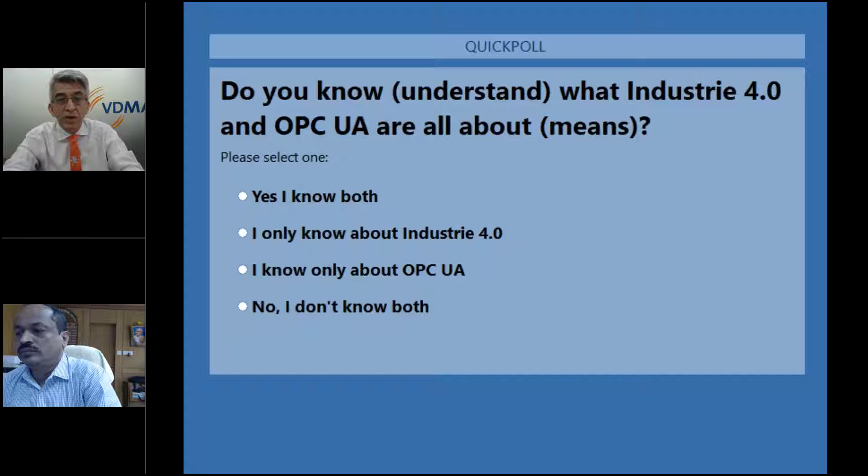Okay, Manoj, can we conclude the poll? It's quite encouraging. 35% of respondents know about both OPC UA and Industry 4.0, and 39% know about Industry 4.0. The awareness for OPC UA needs to be created, and that is the aim of this web seminar, to inform the Indian industry and the participants about OPC UA. We have 14% who don't know about OPC UA and Industry 4.0. For these participants, it will be a good learning as well as a good awareness on Industry 4.0 and OPC UA.

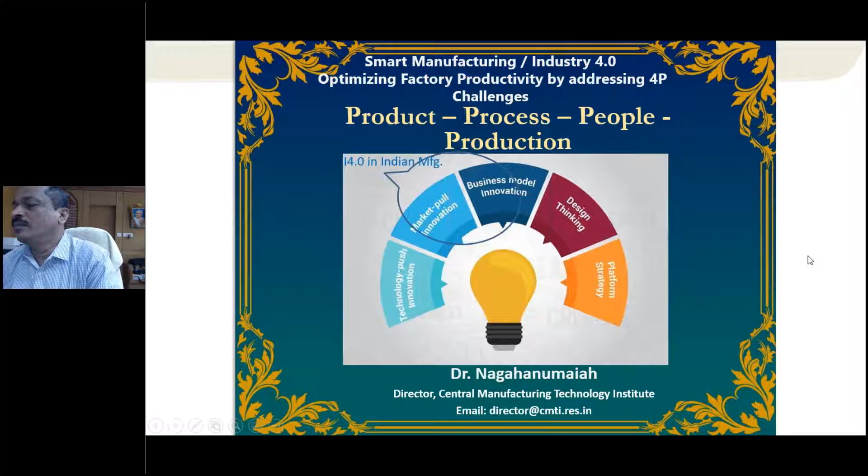My understanding is Industry 4.0, in the Indian manufacturing context, is more of a market pull innovation, partly a business model innovation. Next slide, please.

You are well aware of the vision of our Honorable Prime Minister, Atmanirbhar Bharat. Since there are many of our German friends here, I covered this slide for their sake. Atmanirbhar is not protectionism, it is not inward looking, it is not just import substitution, it is not even economic nationalism. It is the process of creating an ecosystem that will allow Indian companies to be globally competitive, thus making India self-reliant.

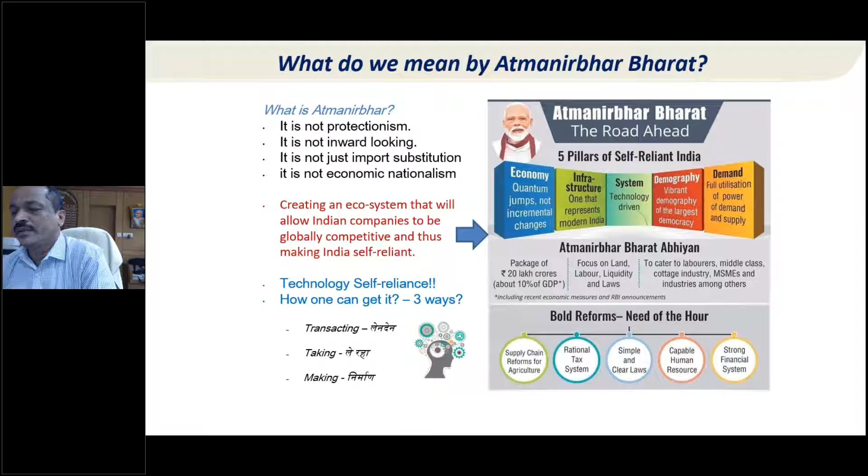So how is that possible? Technology self-reliance will not happen overnight. There are different ways, but three are the major ones: how we can get self-reliance by transacting, by taking, and by making. Next. Let us look at how this could be relevant, if we really wanted, one would catch up on this.

If I look at transacting, taking, and making are options available for the Indian company. So now, can I transact or do business? Here, the Indian manufacturing company has a strong pyramid. Basically the bottom of the pyramid is MSME. Each MSME has skill dependent and they are unique.

Unfortunately, many skill sets are even not traditionally developed, but not documented. And second, Jugaad innovation is still the USP of many MSME industries, barring the high-tech companies. Mostly MSMEs, even today, their survival is because of Jugaad innovations. But the disadvantage with this is the poor assurance, the poor repeatability.

So then can I purchase? Yes, again, it is difficult adopting the skills and capabilities developed elsewhere. Absorption is always a challenge in MSME because retaining intellectual manpower is really tough.

But yes, in the 90s, if you look at Maruti, it is one of the best known examples, because we acquired the technology, scientific manufacturing techniques from Suzuki. That made India a leader in automotive manufacturing.

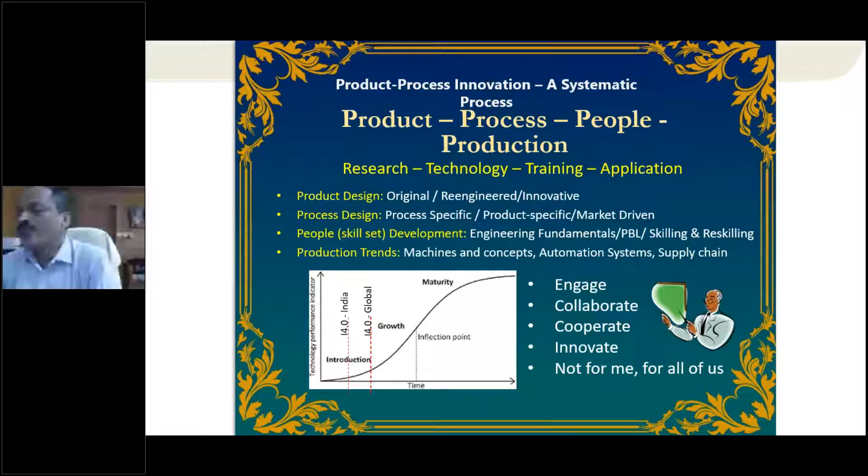This is always a systematic process. One has to depend on several other technologies. I think this is a very popular picture - it is there in Google if you search it.

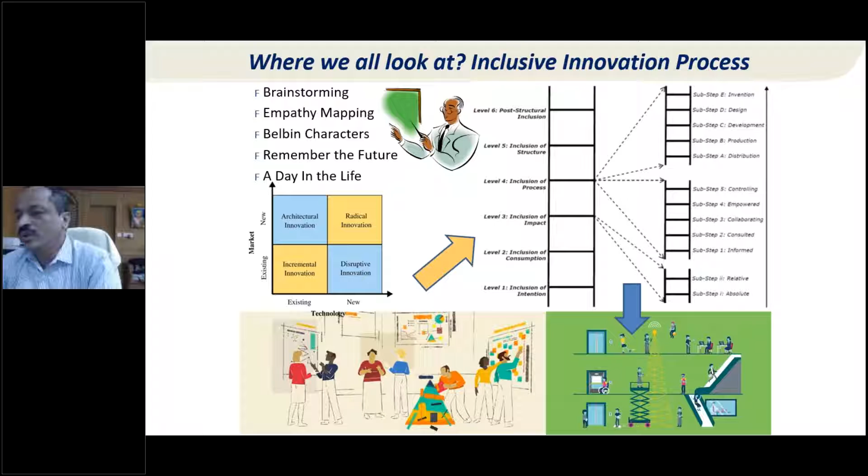Now at this stage, where we all look at, yes, this is a time to discuss and develop this technology in an inclusive way. Of course, there are several tools, this is just to emphasize what it means - inclusive innovation process. There are different tools available, so we need to follow this. I think this is where we now stand globally. Definitely there is a requirement of several technologies, including a common language.

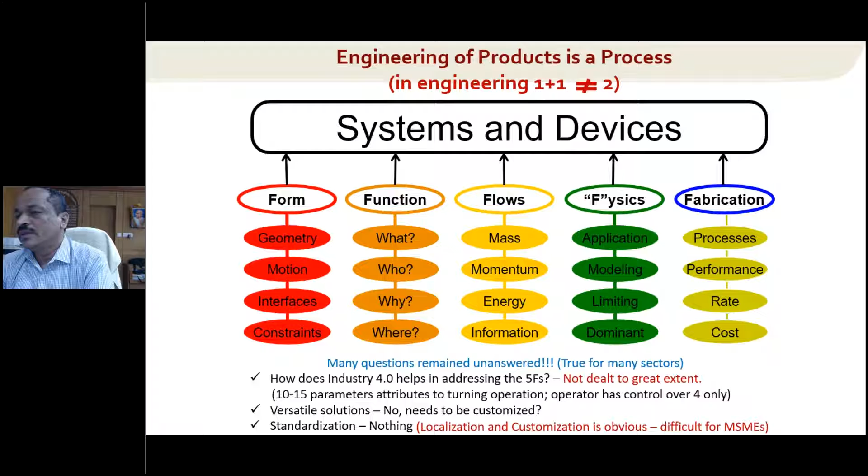Second, when we look at Industry 4.0, you cannot look at this in isolation, because manufacturing involves three essential components: the manufacturing process, which means the process has to be intelligent enough; the manufacturing equipment, which means your machine should be smart enough; and you should also address the other aspect, you should have smart operation systems. So Industry 4.0 being implemented covers all this, and only then can you realize the smart factory. With this background, CMTI has our Smart Manufacturing Center.

We are trying to develop some of these solutions, both following cooperation and collaboration. We collaborated with about 6 industries, and we have also created test beds that would facilitate cooperation with other co-developers for technology acquisition and implementation.

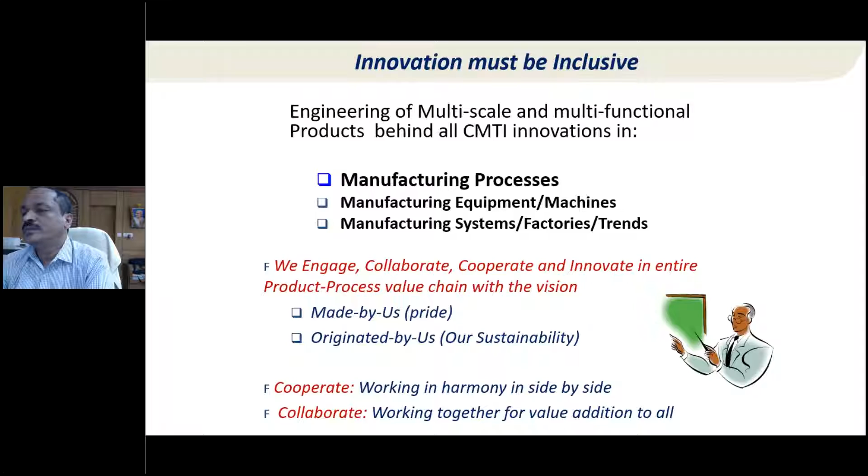We have conducted several awareness programs, and there were a lot of queries, some of which I mentioned in the previous slide. At this moment, our advocacy to small scale industry is: there is no universal technology, you need to customize. Also, several attempts are in process to develop standardized practices, so one has to look at engineered as well as indigenous technologies.

Indian industry being an MSME-focused manufacturing sector, no one will accept if I go and say that you should change your capital and buy a completely integrated smart machine. It is not going to happen. So our center particularly focuses on helping MSMEs convert their individual legacy machines into smart machines. That is one approach.

Second, once you can do that, you try to work on connectivity of the machines. Once machine-to-machine connectivity or interfaces are established, then you look at the shop floor, connecting the shop floor to the public network. Big data, analytics, and enterprise management may be a little difficult for MSMEs to have.

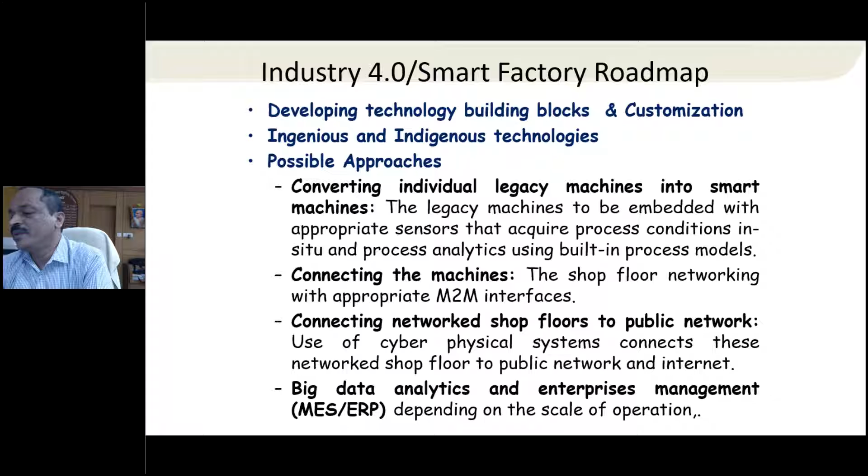The reason is HR is the major constraint. But fortunately, many startups have started focusing particularly on big data analytics, data sciences, and manufacturing data science management. I think these services could be made available to MSMEs in the near future.

With this background, yes, there has been a lot of emphasis from the government side in India. One major initiative from the Ministry of Heavy Industry, our parent ministry, has come up with programs like Samarth Udyog Bharat, wherein 4 such centers have been established: one at CMTI, another at IISc Bangalore, a third at IIT Delhi, and one more at the private Kirloskar Center of Learning in Pune.

These Samarth centers are similar, and at the same time focusing on different aspects of Industry 4.0 technology pillars.

For example, the Pune Center conducted a survey. I'm just showing 2-3 slides of what they found in that survey. They assessed 3 parameters: limited awareness, underdeveloped system ecosystem, and implementation support. Their survey indicates that there is a varying definition of Industry 4.0, so it is not very well understood by many companies.

Appreciation of relevance to the business is something the industry is not yet able to reach, hence limited perceived value. My comment on this condition is, as I said, there is no universal technology. Today, if somebody asks can you implement a technology that gives well-evidenced ROI, the answer is no, because it should be implemented or customized to your local company, machine, and shop floor. That is how it happens, so I think this will take some more time.

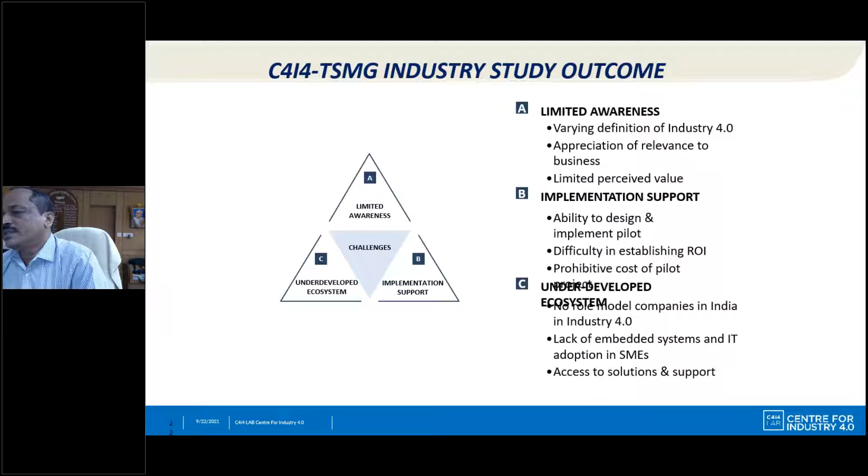This is another aspect, subject to the area, like advanced manufacturing technology, additive manufacturing technology, IIoT aspects, and with respect to CapEx spends. This study has done a detailed analysis. What it says is over 50% of organizations either have no investment plans or plan to spend less than 5% of CapEx on Industry 4.0 adoption. I think that is the kind of indication of where Indian companies stand today with respect to Industry 4.0.

Of course, this study is more MSME focused. Next.

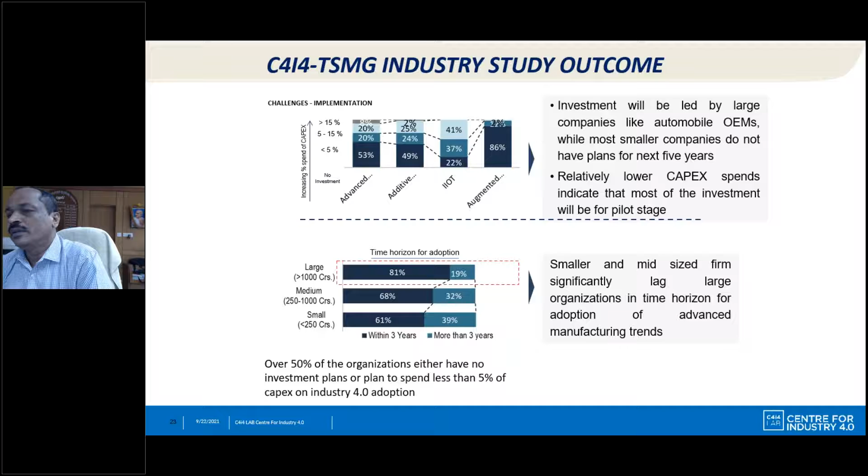Depending on this outcome, there are many activities. Basically we try to identify these in our Centers of Excellence, which are funded by our ministry - technical consulting, business consulting, pilot designing, adopting startups and startup mentors. That is where we also conduct several awareness programs. I think all our 4 centers are focusing on this.

In addition, our CMTI Center is establishing a smart factory, which is a production factory demonstration cell. Similarly, the IISc Center works on different technological aspects, more software-dependent solutions. And IIT Delhi works more focused on control aspects. Like that, we basically address different problems. All four centers collaborate with each other and work together. Next.

Next slide. I think the details here are not readable, but basically different parameters have been identified. We, the Centers of Excellence, conducted a survey among industries, both MSME and large scale industry. What I find is that the 50% figure we mentioned is more representative of small scale industry status. Next slide.

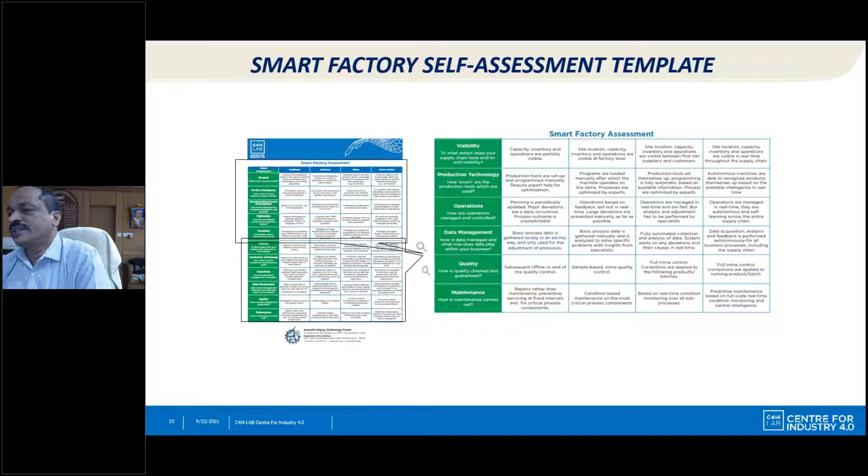Now we are working on different other aspects. The basic idea is that these challenges have to be addressed. One is where to start the Industry 4.0 journey - this is where industry is looking for an answer. How to prepare a systematic digital transformation roadmap in the company. Are my suppliers and customers ready for horizontal integration of Industry 4.0 solutions? I think these are the fundamental questions that have to be answered.

The solution would be understanding where they are in the journey towards digitization, identifying and setting priorities for immediate opportunity areas for digitization, and creating a successful digital roadmap for the company. This is where the Centers of Excellence come in, supporting MSMEs in different ways, starting from awareness programs to demonstration of a smart factory. Next.

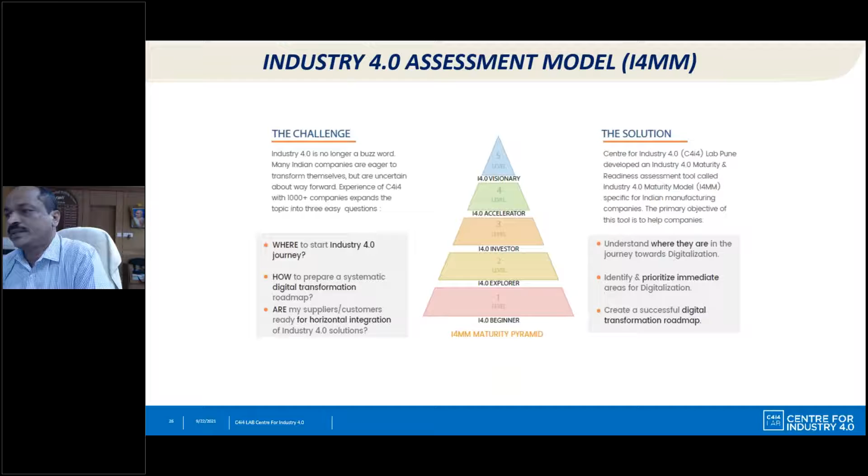This is another study conducted for specific applications. Several such studies were conducted. This one is for plastic component manufacturing, components produced by injection molding. Our centers try to help the MSME in identifying the complete value chain, the manufacturing value chain of their business profile. Next slide.

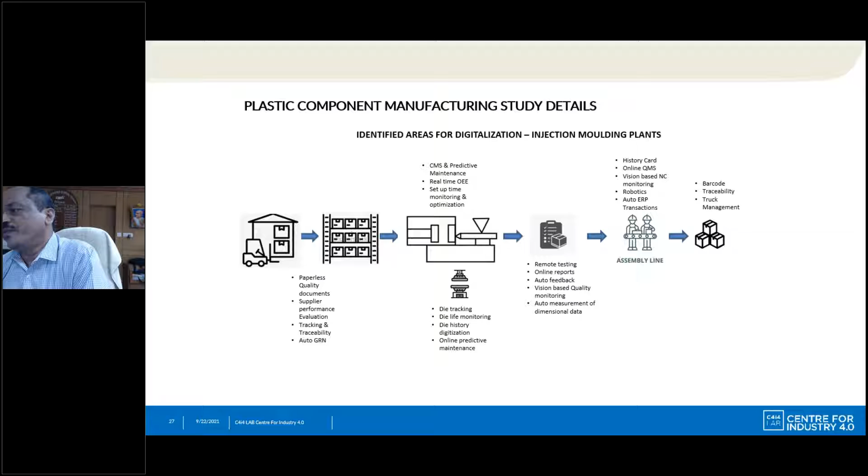What we do with our center, particularly CMTI center: we build machines. We are basically machine tool builders, so we are working on building smart machines and devices, making manufacturing process intelligence, and then training, technology transfer and incubation. Next slide will show the pictorial representation.

This is the smart factory being established at CMTI. We are trying to mimic a complete factory - it is like a smart production factory. As I said, there are two purposes: one is showcasing, and the second is providing services like a test bed.

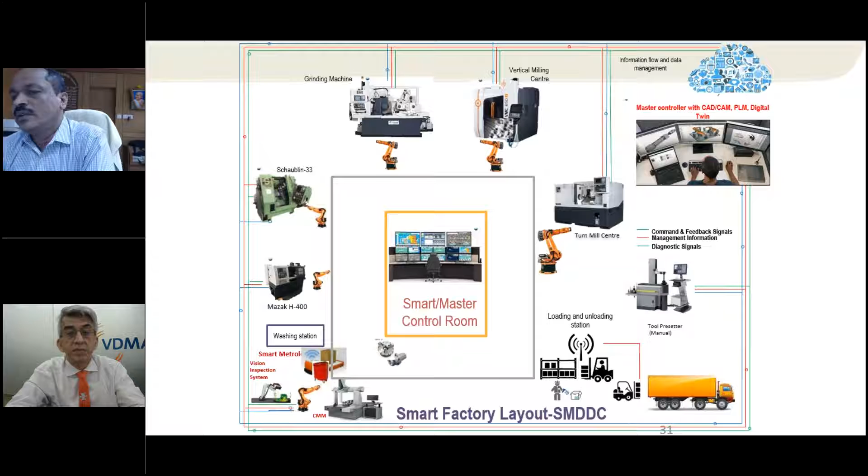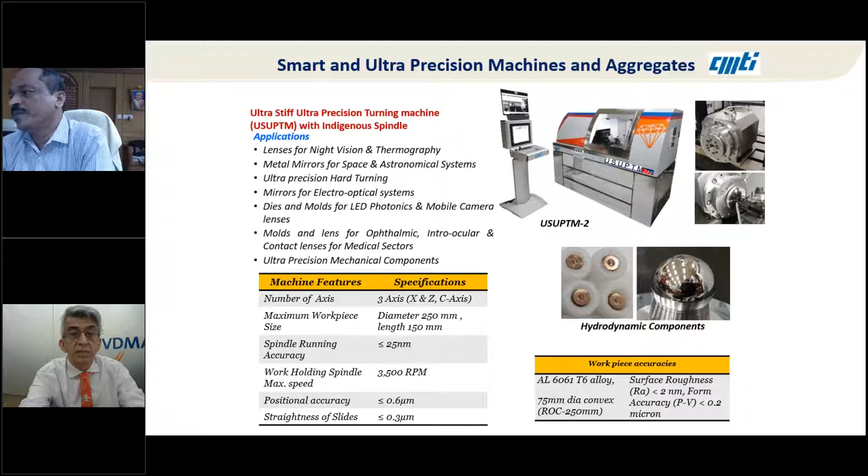Here I will give one more example. Recently we collaborated with 3 research establishments - NIST, CMERI, and CMTI - and with 7 academic institutes, to develop IIoT implementation on metal casting. I think this project is quite successful.

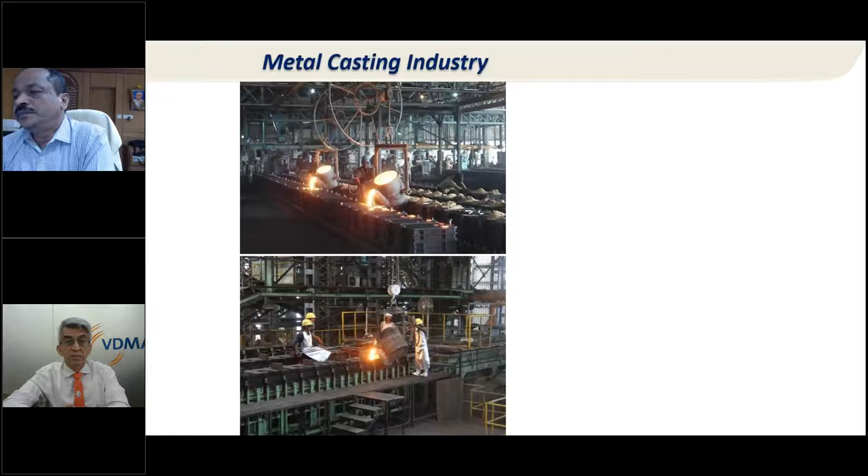What we are trying to do is convert automated metal casting, shown on the left side, into a smart foundry where all machines are connected, established within 25 square meters, within 25 lakhs, and completely smart. That is the concept we started with in early 2017. Now this has been developed.

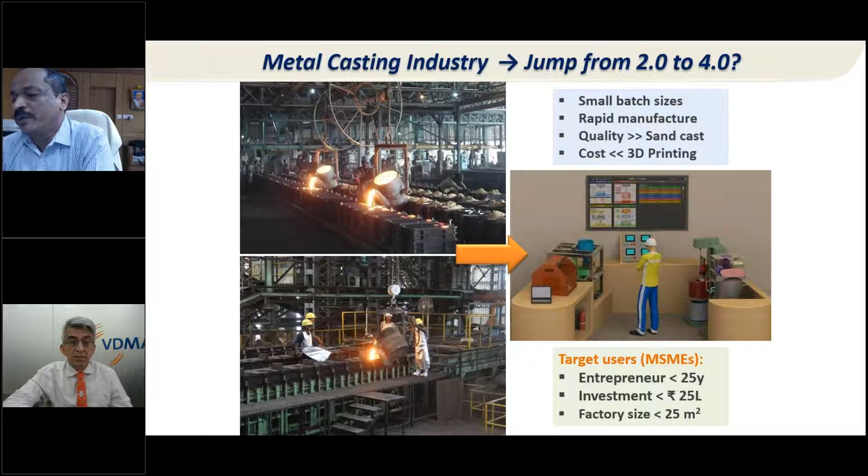I think this is a good, clear demonstration that a heterogeneous team can develop a complete solution, starting from part design to hardware, sensor integration, including IIoT platform for metal casting. Nothing like this exists globally, including data visualization and evaluation. The complete solution is developed by a group of 10 research groups.

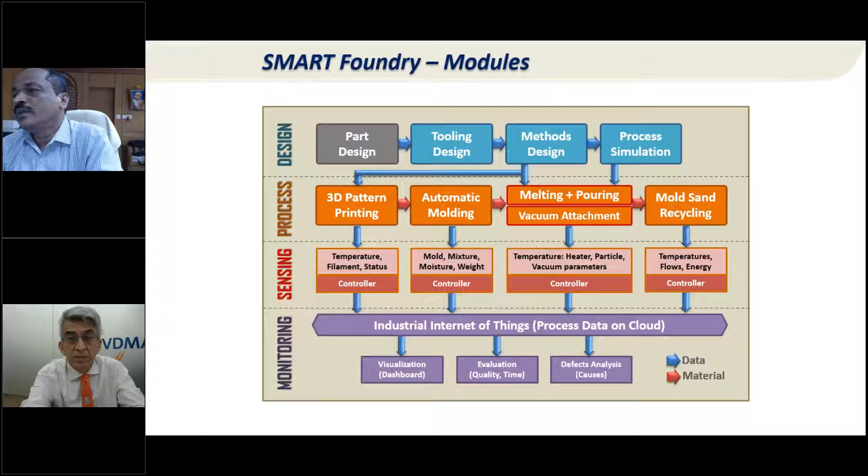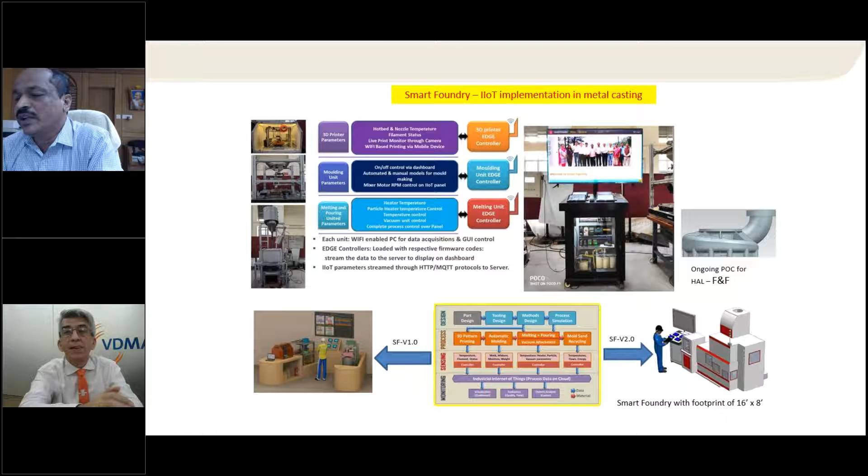We are running short of time, so let's move to the last slides. Basically, this is what we have developed: the factory, the foundry, within a footprint of 16 feet by 8 feet.

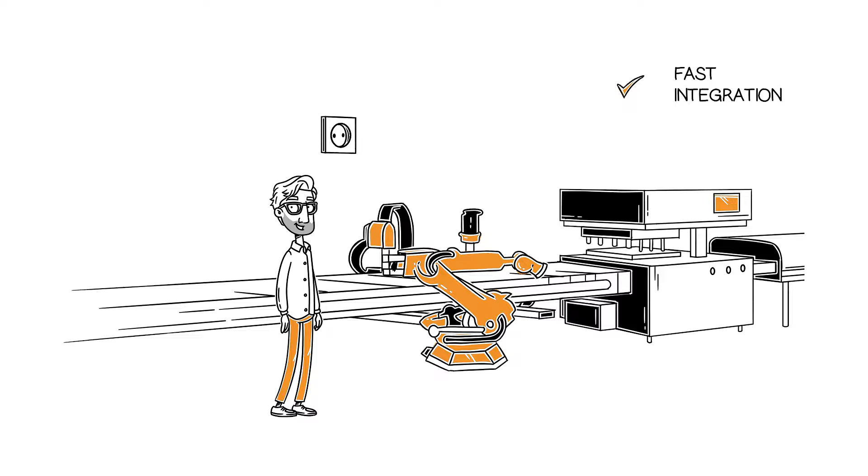Together with mechanical engineering companies, the VDMA is developing OPC UA companion specifications. Why? Open Platform Communication Unified Architecture, or OPC UA for short, allows engineers a platform-independent, interoperable, and vendor-independent integration of different machines in production. The VDMA represents more than 3,300 member companies and is the voice of the mechanical engineering industry in Germany and Europe. The VDMA supports manufacturers in developing OPC UA companion specifications. This ensures smooth Industry 4.0 communication, both between machines and from machines to other systems, leading to more efficient production. For engineers, this results in the Industry 4.0 application fields of plug and work, condition monitoring, predictive maintenance, and OEE improvement. OPC UA companion specifications define the form in which machines provide certain information, making integration into an existing production environment and configuring machines much easier and the engineer's work much more efficient. That's how Industry 4.0 works.

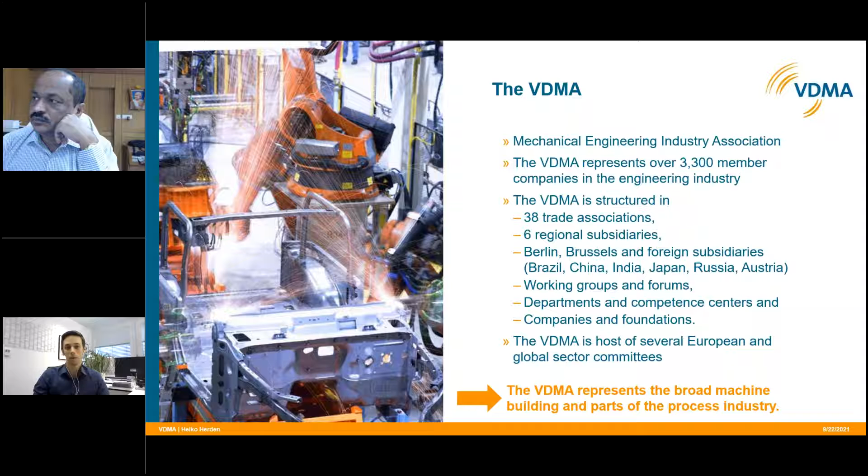Yes, thank you very much. I'm glad that I see so many participants here today. As we have seen in the poll, it seems like some information on OPC UA isn't wrong here, so let's directly start on the topic of the global production language. First of all, I'm from the VDMA, and as Rajesh Nath already explained, we are the Mechanical Engineering Industry Association of Germany. What's important for the later slides is that the VDMA is structured into 38 different trade associations, and all of those work more or less on the companion specifications we saw in the video, but I'll get to this later. So let's get started on the topic.

We want to connect machines, and we want to connect them on different levels: horizontal networking and vertical networking. Horizontal networking means the machine is on the same level with, for example, another machine, so machine-to-machine communication on the field level. Vertical networking means the machine is communicating with something on another level, maybe a lower level to a component, or a higher level to an MES system, an ERP system, or a cloud system. These are the two kinds of networking.

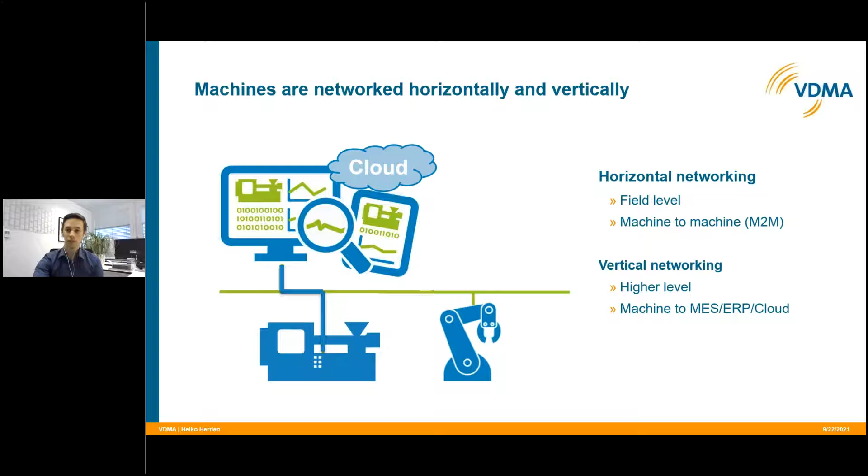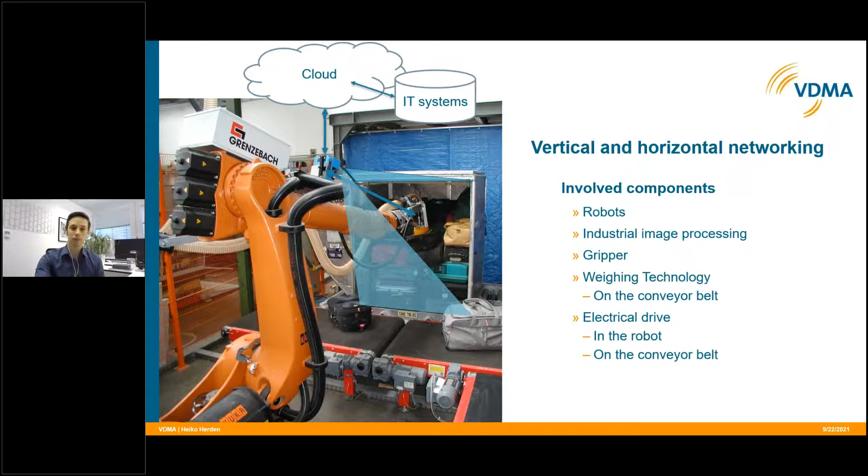And in the end, they also need to communicate with some sort of system. It might be in the cloud, but it might be some IT system within an airport, for example. And what we want to have is manufacturer neutral interoperability in the industrial environment. This is what is desired.

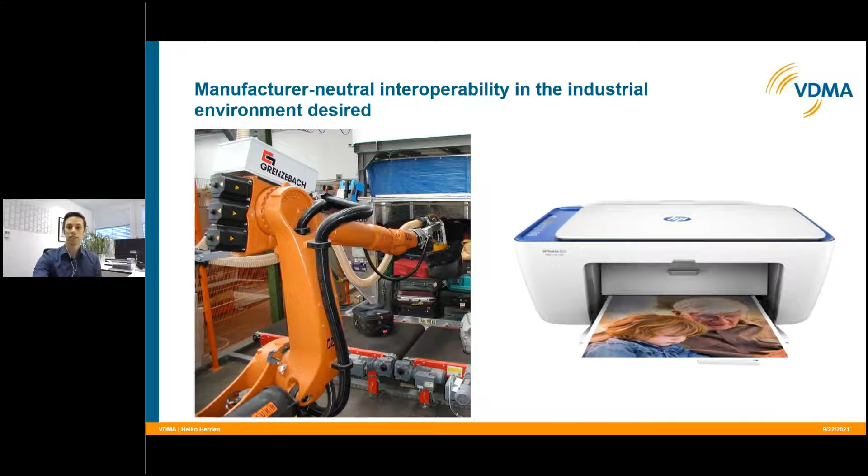What does this mean? It means the components we have seen should easily work together, as easy as if you go into the market, you buy a new printer, you connect it to your home computer, plug in the USB plug, and it will work, or maybe it will install some driver, but it will work afterwards, and you don't need an expert to come to your home and adjust it for several hours. It will work. This is what's called plug and work, and this is what we are aiming for in the factories as well. And to achieve this goal, we figured that OPC-UA is a solution.

OPC-UA, as you have seen in the video, stands for Open Platform Communication Unified Architecture. It's also an IEC standard, and it meets all the different requirements for mechanical engineering. For example, OPC-UA is open source. It has security built in by design, which is very important these days, so you have secure transmission of your data, plus profile management, user management, certificate handling and stuff like this.

There are various protocols that are part of OPC-UA. I will tell you a little bit more about this later. And this is a very important point: OPC-UA has the possibility to have semantic machine descriptions in those companion specifications.

Also quite a good point about OPC-UA is that it is scalable. So you can have it in very small embedded devices in the field, as well as on a very strong computer running Windows or Mac software. And all those OPC-UA clients or servers work together in the end.

So what is OPC-UA, the technology? It consists mainly of two parts: the part of transportation and the part of information. I want to go through those two parts and tell you a little bit more about it.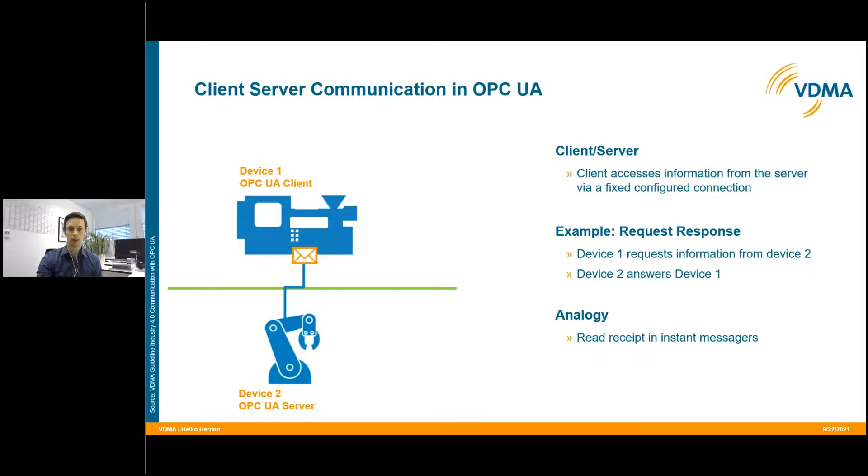Then the third mechanism is PubSub, or publisher-subscriber communication in OPC-UA. This means that the publisher sends the information out to unknown subscribers without a fixed connection.

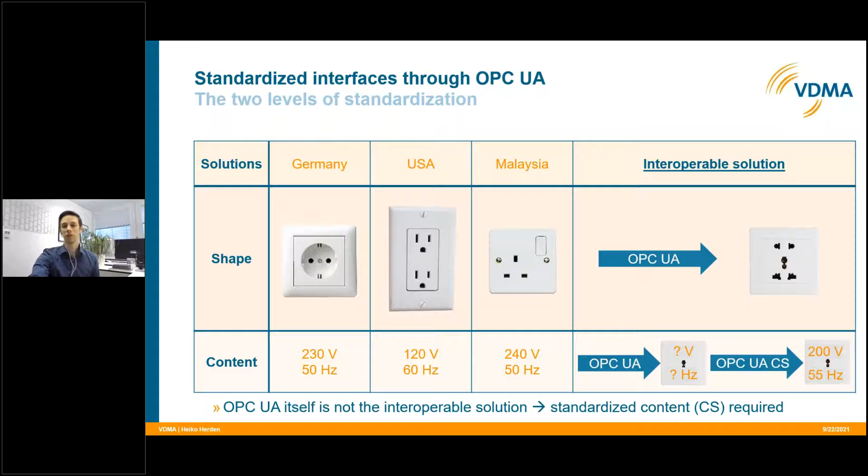And this is how I get back to this slide here. So we have the transport on the bottom, which is very important to have our solution in the end, but we also need the information part, and this consists of different levels.

On the first level, we have the OPC-UA meta model, where we have the description of things like what is a string, an integer, so very generic information. Then we have built-in information models which describe, for example, some basic things about what is a device, and those things are handled by the OPC Foundation.

On top of that, we have OPC-UA companion specifications. So every domain, for example robotics, describes the information which an interface of a robot should have. And for the field of mechanical engineering, the VDMA is leading all those companion specification groups.

On top of that, you can still have vendor-specific extensions, which means that if you have something that is quite special and is maybe even a reason why you sell your machine and not your competitor's machine, then you don't put it in the standard, you have it on top.

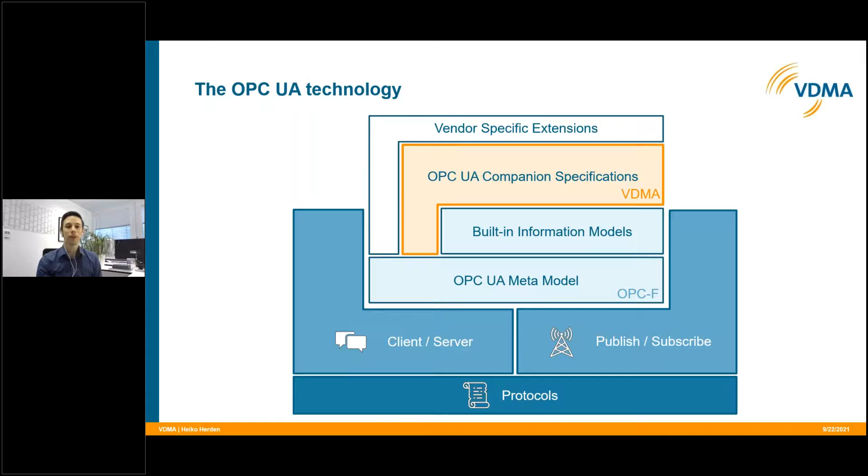Now let's take a look at VDMA organizations. I mentioned the 38 trade organizations. You can see them here.

Now let's see where we have OPC-UA companion specifications standardized already. I marked them in blue. When they have something out on the market already, it's either a release candidate, which means you can still comment on a draft, or it is a fully released companion specification, which means it has already been a release candidate for at least 90 days.

So we have compressors, compressed air and vacuum technology. We have food processing and packaging machinery. We have glass machinery, machine tools and manufacturing systems, machine vision. There are quite some companion specifications for the field of plastics and rubber machinery. We have the field of pumps and systems. We have the field of robotics, like I mentioned before. We have the field of weighing technology and woodworking machinery. So there are quite some companion specifications out already.

You can download them on our VDMA homepage, on the homepage from the OPC Foundation, or on GitHub. The companion specifications are free, so you can just use them. If you want to get involved in creating companion specifications, you have to be either a member of the OPC Foundation or the VDMA.

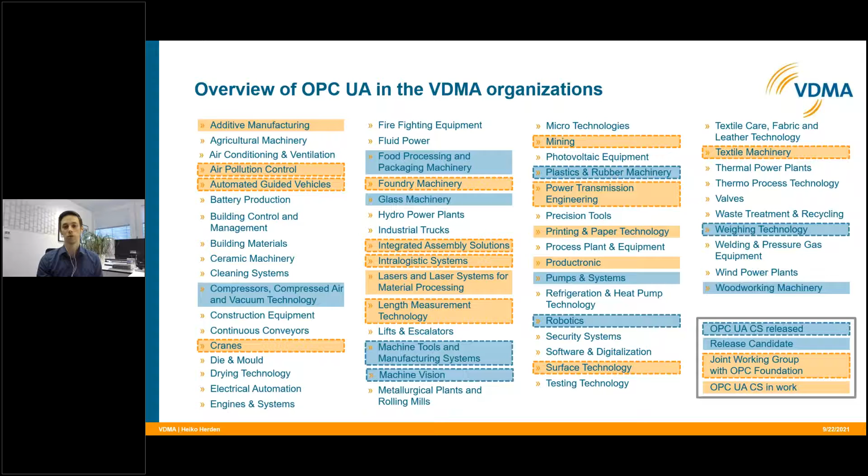So let's take a look at what groups are working on companion specifications at the moment. As you can see, it's even more. I marked them in orange here. We have additive manufacturing, air pollution control, automated guided vehicles, cranes, foundry machinery from metallurgy, integrated assembly solutions doing end-of-arm tools like the gripper we've seen before, intralogistic systems, laser, length measurement technology, mining, power transmission engineering working on electrical drives, printing and paper technology, productronic, surface technology handling material supply systems, and textile machinery also has a group working on a companion specification. So in general, you can see we put a tremendous effort on this. We have more than 25 sectors in active development, more than 35 active working groups, and this means more than 600 companies are involved in describing those companion specifications.

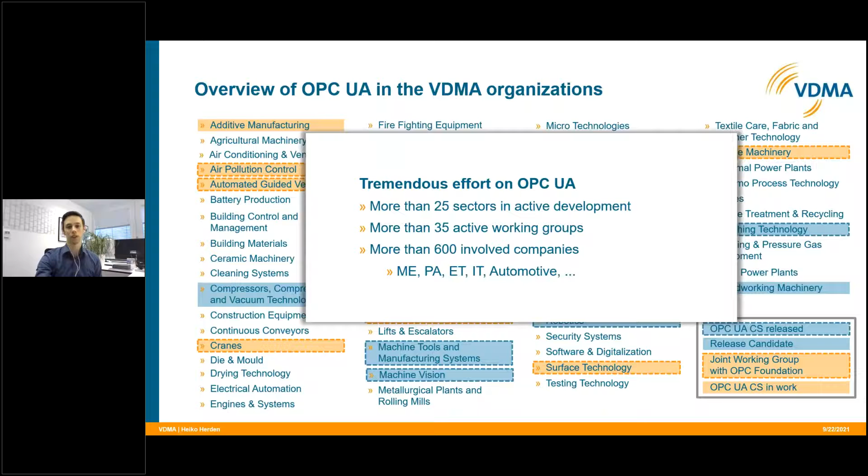So we want to achieve interoperability, that's what I said in the beginning. Now let's see where we are. We started with Industry 3.0, which was proprietary communication, and now we're going towards Industry 4.0. With OPC UA we have a meshed communication network, which is the basic foundation for everything. And with those groups I've just shown you working on companion specifications, we have domain-specific harmonized information models, which is the next step for Industry 4.0. But to really achieve the idea of plug and work, we need cross-domain harmonized information models.

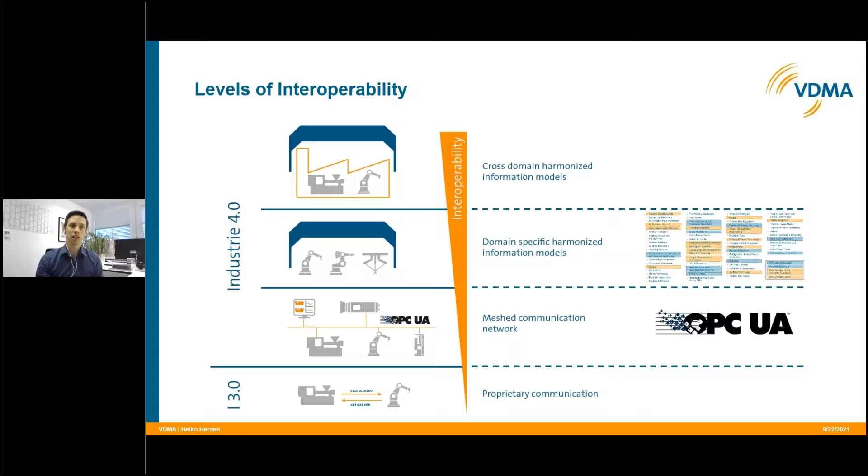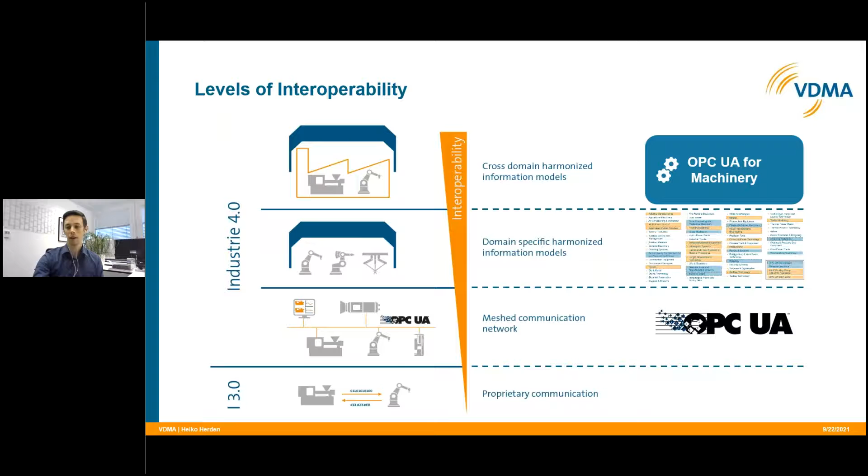And to get those cross-domain harmonized information models, we have a group, a companion specification called OPC UA for Machinery. I'll tell you a little bit more about it now. OPC UA for Machinery is a companion specification, but it's not just for one sector like robotics, drives, woodworking machines, or glass cutting machines. This one is really for the whole mechanical engineering industry. In machinery, we define harmonized basic building blocks for broad use, and each building block stands for a specific use case. This means those building blocks can be referenced from other companion specifications or implemented as a standalone model.

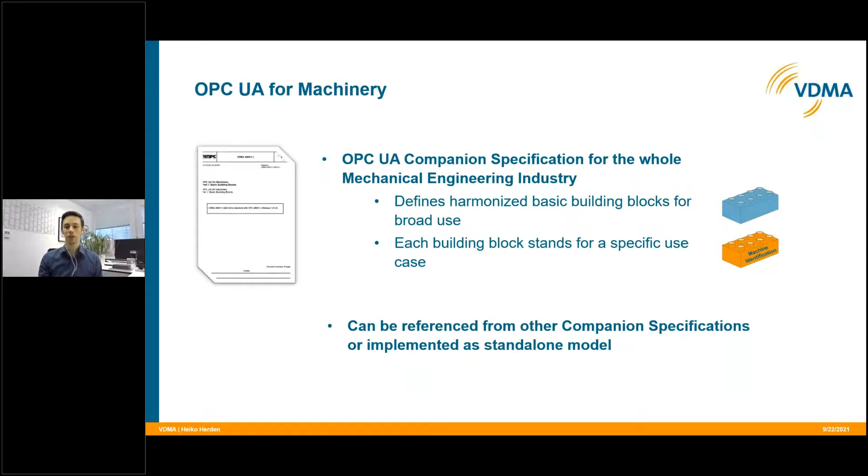So for example, as you can see in the picture here, we have a use case: machine identification. If you, as a textile testing machine companion spec, say you want the use case of machine identification, you can just take the building block from machinery and you'll have the same interface as everybody else who takes the building block from machinery. So to speak, OPC UA for machinery forms the basis for interoperability.

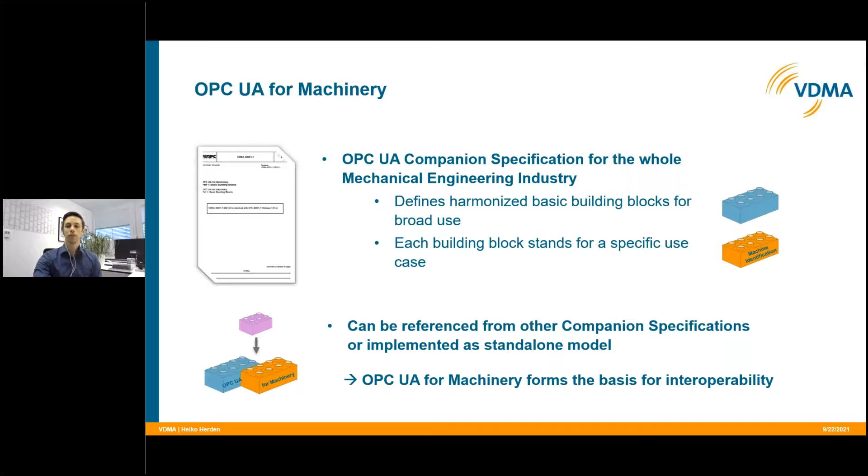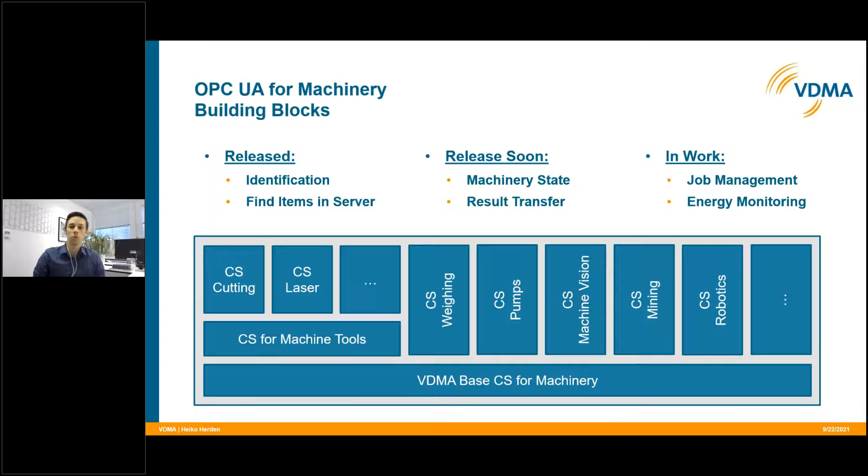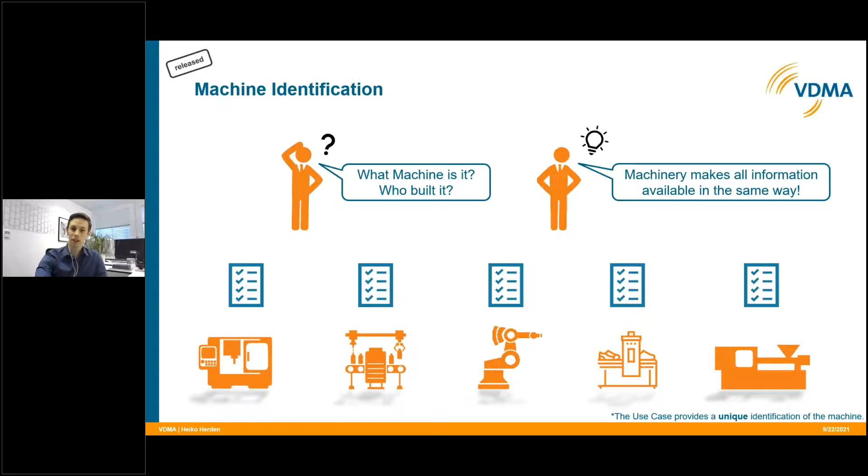So that's how it's handled. Let's take a look at those use cases I've just explained. First, let's look at machine identification. This is for the question: what machine is it, who built it? If you're standing in a factory, there are a lot of different machines, and maybe you have an MES system connecting to all of them. With machinery, it gets pretty simple - you get all the information available in the same way, and can also take a short look at the information provided there. We have three mandatory parameters which you really have to have in your interface.

The product instance URI, the manufacturer, and the serial number - those three guarantee that your machine is uniquely identifiable. We have several more optional parameters. Some are provided by the vendor of the machine and some are provided by the user of the machine.

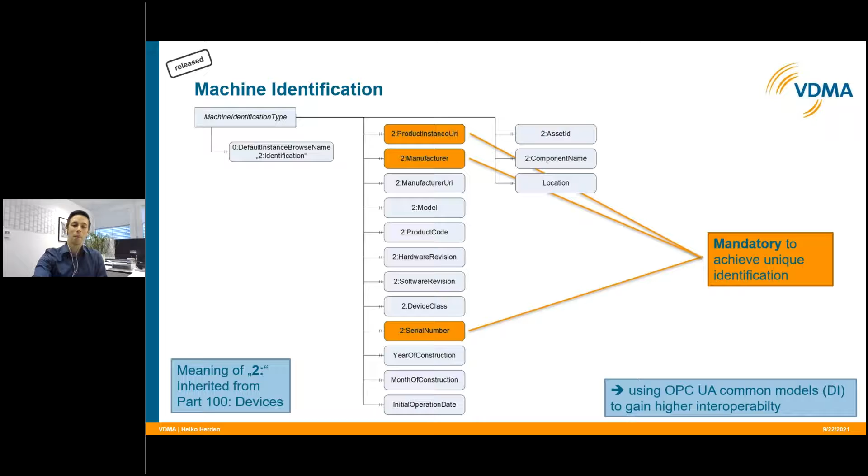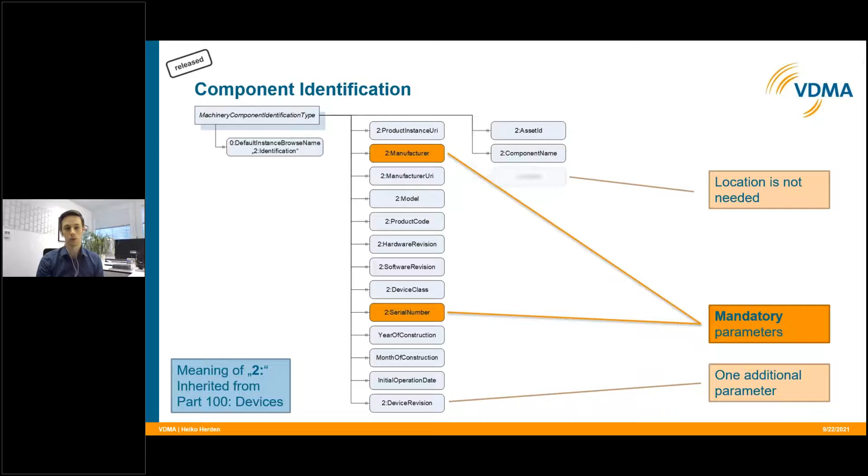The ones provided by the user you can see on the right side. So this is basically what our machine identification looks like. I don't want to go too much into detail because this is now OPC UA information modeling specific, but just to give you an idea. We also have the component identification, which is slightly different than the machine identification. For example, we don't have a location needed there, because usually a component is part of a machine and you already know the location of the machine. On the other hand, we needed an additional parameter, and we only have two mandatory parameters here, because you can't guarantee a unique identification of components as well as you can with machines. Then, like I said, we have the listing of machinery items.

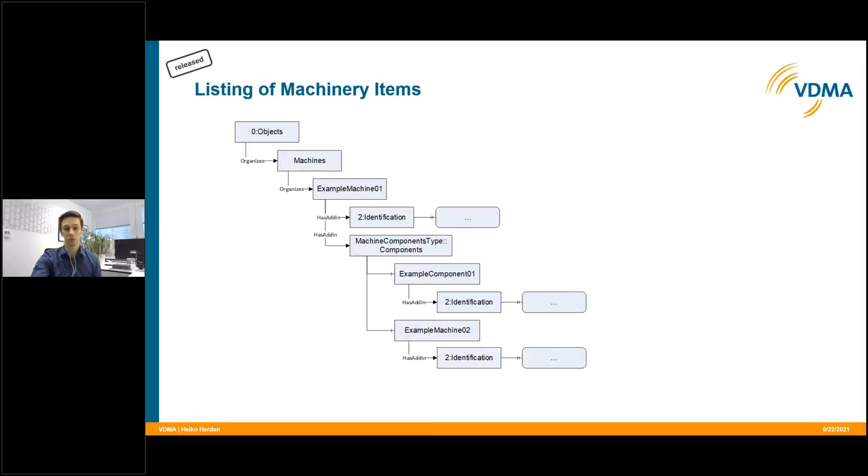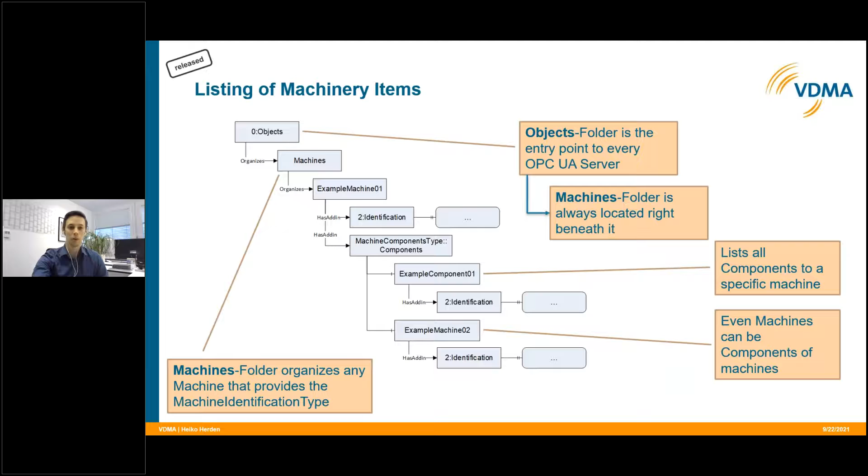This is that we can find all the different machines in a server, in an aggregating server. So we have basically a folder which lists all the machines, and every machine has a folder which lists all the components of that specific machine. We also guarantee that you can model special cases, like a machine acting as a component of another machine. But like I said before, I don't want to go into detail too much, as we are a bit ahead of time already.

One more topic I want to address is the use case which will be out very soon: the use case of the machine state. At the moment, if we look at our production across all the different machines, we find different states. Some states will only be numbers, but some will have words like working, running, executing, production, dry run. That's how it is at the moment. Every sector, every branch has different names for those states.

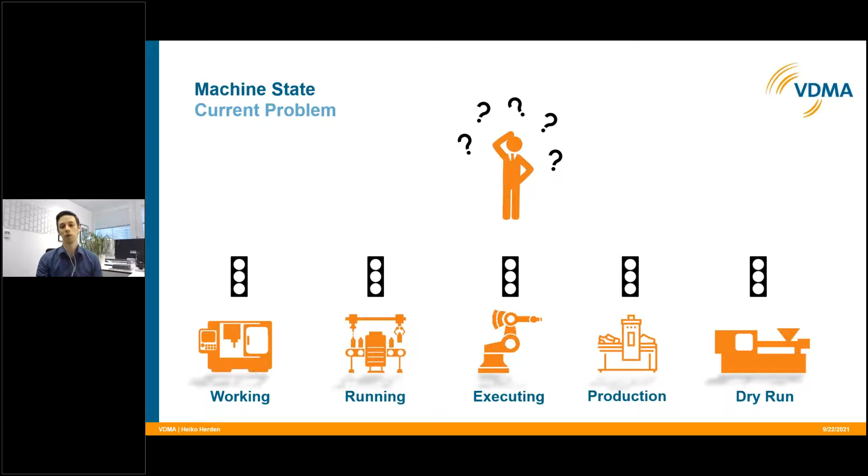But with the machinery specification, we get the same signal from all of them. So in this example, we will see, okay, all those machines are executing. I know everything is fine. And this is the machine view for the machinery state.

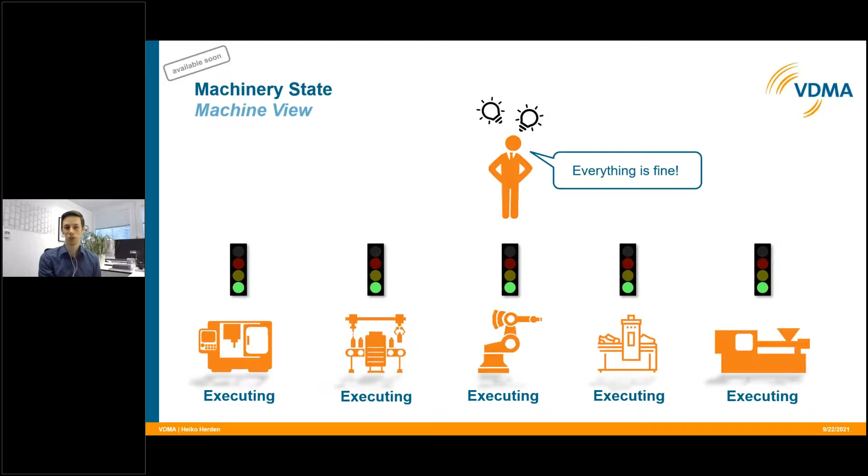The machinery state also helps when you look at components, when you have the component view. In this example, we can see a beverage filling line that is out of service — the red light means it's out of service. I ask myself, why is my machine out of service? Then I can look into the components and see, okay, the conveyor is yellow, which means it doesn't do something, but it could. The injection is also yellow, meaning it could do something, but doesn't. The only thing that's really red is the gripper. So I know, okay, I have a jammed gripper — this is the root cause of my problem.

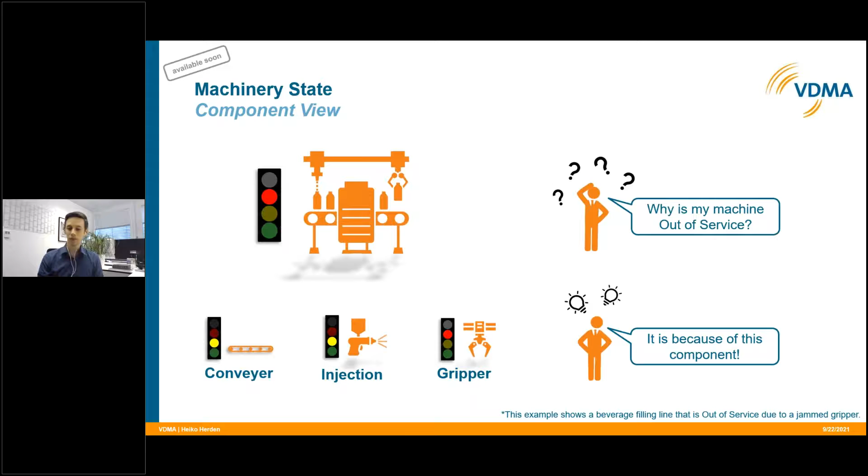This is quite a use case together with getting key performance indicators. In this example, I know that my machine is 2 hours out of service, 1 hour not executing, and 5 hours in executing state. With this information, I can get the machine availability. I know the actual production time is 5 hours, and the planned busy time is 8 hours. If I want to know the availability, I divide one through the other, and I get an availability of 62.5% after the ISO 22400.

And that's just one example of how to use those figures you get from OPC UA for machinery.

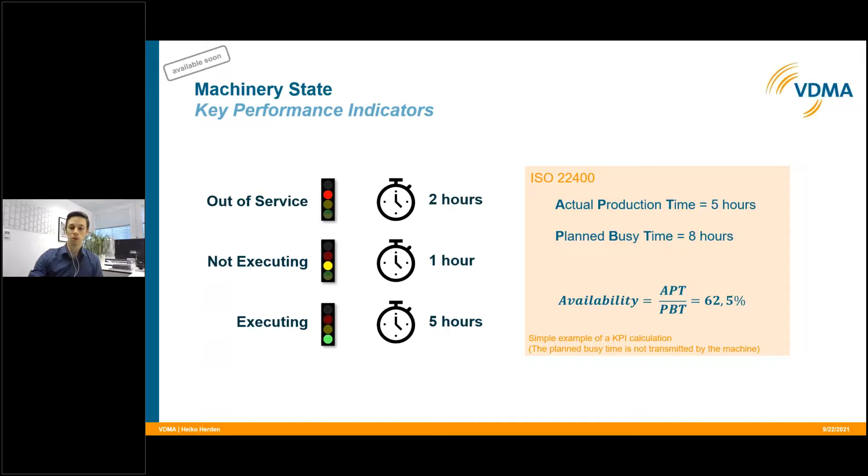So let's get to the conclusion for this presentation. OPC UA enables interfaces to be standardized in the course of Industry 4.0. It meets the requirements of mechanical engineering, as I've shown, with scalability and security built in by design, and the possibility to have semantic machine descriptions. It offers transport mechanisms and data modeling. The VDMA works on information models with over 600 companies involved worldwide in about 35 working groups. We also developed a harmonization in the OPC UA for machinery. And this is really my message for you today.

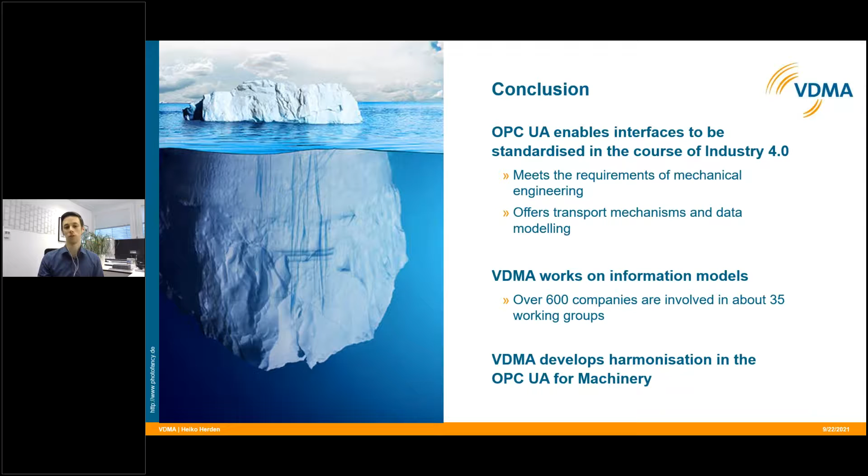So if you use OPC UA, at first you might only try out how OPC UA works, but later you'll get to the point of information modeling of your machine. You should really use existing information models as a basis for your own information modeling, and you should definitely use OPC UA for machinery, because in the future it will be very important, as this is a really big step towards plug and work, or plug and play. This is really what I want to tell you: if you work with OPC UA, you should also consider using the OPC UA for machinery specification.